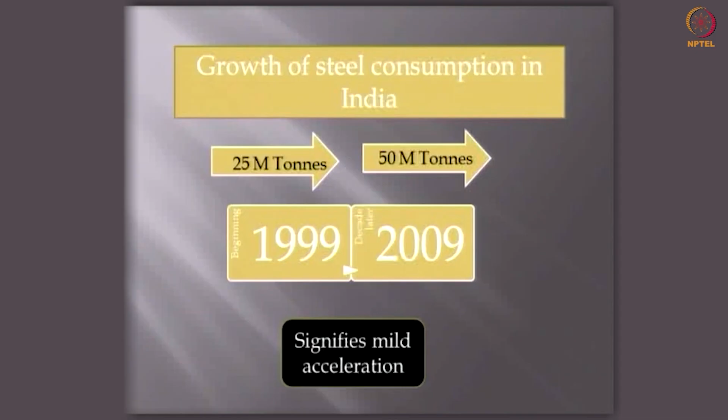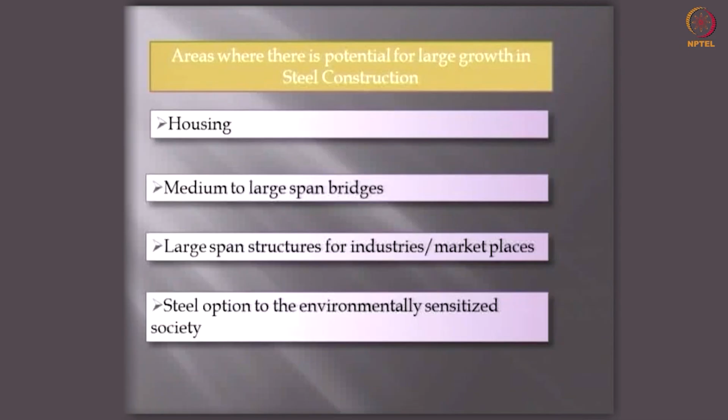So the government of India wants about another 20 million tons of steel to be used in the next few years. So the usage of steel in construction, not in the traditional avenues, definitely has a bearing on the Indian economy. Now these are the areas of potential large growth of steel construction in India particularly. I am not talking about the traditional avenues like industrial structures, trusses, very many small amounts of steel construction, but amazingly new types of structures.

The first is housing, the second is medium to large span bridges, because the requirement of these bridges is not dictated by the strength or the load, but entirely by community-dictated design parameters. I will tell you what they are as the lecture goes on. Secondly, we talk about FDI, the foreign direct investment in India, which is going to create quite a number of marketplaces for the short duration. So possibly steel is a very good option, and the number is going to increase quite amazingly.

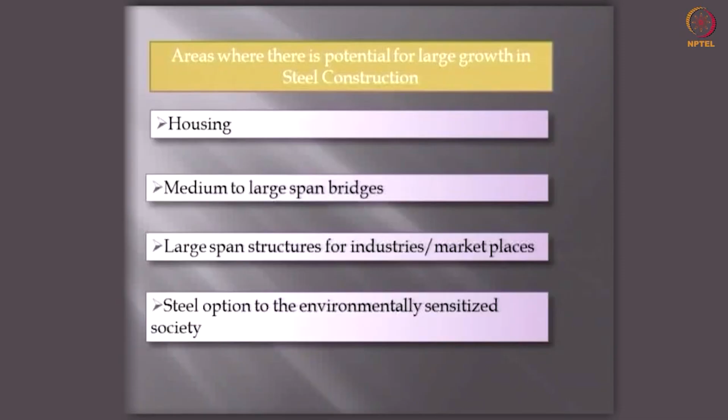And the last point is, today we are talking about sustainability, and every citizen is very sensitized about environmental awareness. So steel is good for a society which is environmentally sensitized. Right. Now I did not say impediments, but perceived impediments to the growth of steel construction in India. Possibly we can overcome them very easily.

The first one is that steel construction involves very many players. We call it the steel chain. We have a producer, a fabricator, a contractor, a designer. The chain is very long, and there has to be some institution which unites all these stakeholders in this business. We do have organizations set up by the Government of India. It is doing its best, but all the private players should come together to make it more meaningful. Today it is only piecemeal and fractured.

Now the culture of alliance: every company wants to make their product, but none of them come together to make an alliance so that steel can go into complementing areas of construction, which is unfortunately missing in the Indian context. This is not only for steel construction, but also for techno-legal issues. If the stakeholders come together, all these issues which are against steel construction can be dealt with in a much better way.

And finally, we have to admit that the weakest link for steel construction in India is in fabrication, because we do not have medium grade fabricators. Either we have top notch fabricators or we have roadside fabricators. Possibly this is one of the avenues where India has to grow.

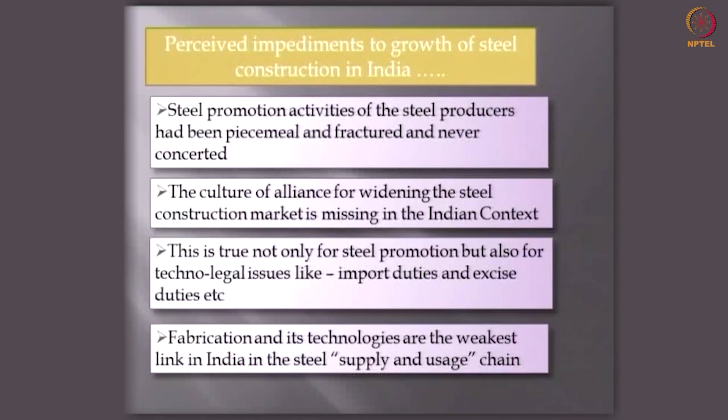Right. Now the impediments are not a problem for us, because we have success stories. We started constructing pre-engineered buildings, called PEBs, in the year 1999, and today it grows around 15 to 20%, and it has almost nudged out the traditional structural steel work. You find every industrial structure is going to be a pre-engineered building, but when the PEB was introduced, the market or the contractors were not very receptive. They had quite a lot of questions, and today PEB is unstoppable.

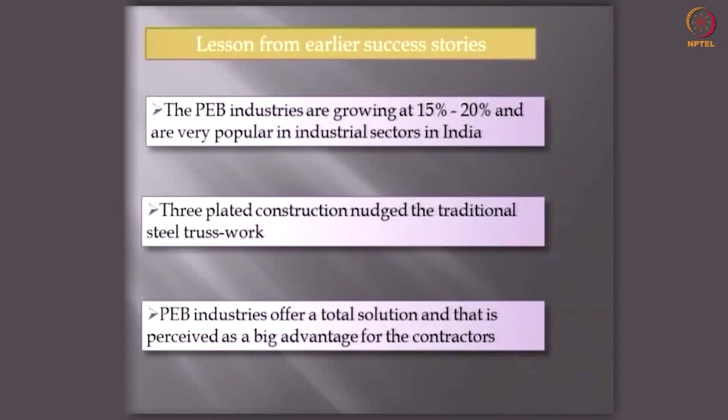Possibly because it offers a total solution, and this has been perceived as a big advantage by the contractors. So I am sure in future steel construction is going to grow in a big way in a country like India. Well, I will now give the avenues of large usage of steel construction.

This is precisely what I said earlier. This is not about the steel which is going to go into traditional avenues which have already been used. This is completely new avenues. The first one I talk about is residential construction. During the end of my lecture, I will show a live example of residential construction that is currently happening in Chhattisgarh, where I was fortunate to go and document a residential flat, about 180 flats.

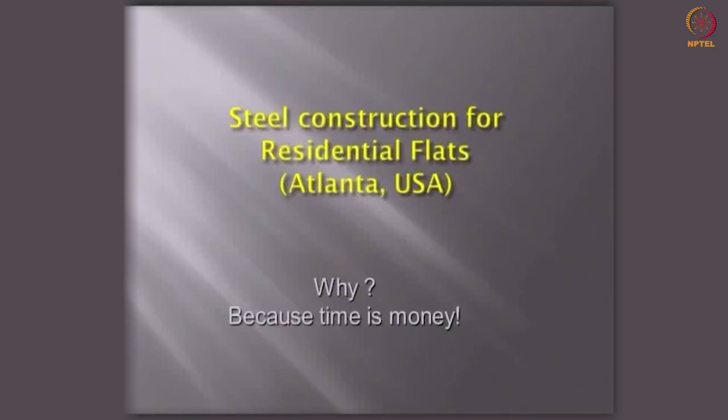Why are all these quick time constructions, or we say rapid constructions, coming up? Because in India also we have started feeling that time is money. We all know that the Western world runs on the principle that time and money are one and the same, right. I would like to give an example.

This is a 180 flat multi-story building that has come up on 10th Street of Atlanta, very near to Georgia Tech, and the specification for the construction is not the strength nor the material, but the time. They said within 9 months the entire construction is to be completed and has to house around 180 students. So the time was the major parameter for this, right.

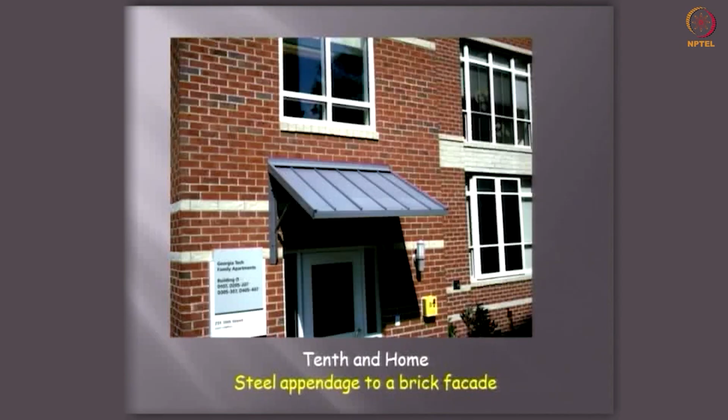Now all these flats are steel concrete composites. You can see this. Much of the steel is appended to the existing facade. You can see here we have a sunshade which is appended to the brick facade. All these sunshades or any other appendages can be fabricated outside and can be quickly fixed onto that. So you can see this is not a brick facade, but just a CP board, and then externally we have pasted a small amount of bricks, giving us a beautiful view of a traditional brick building.

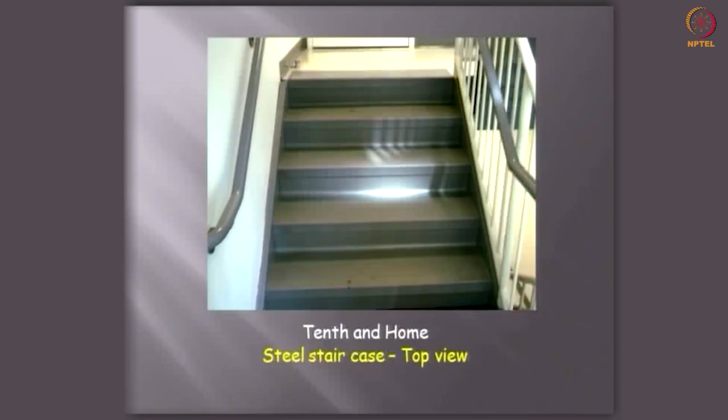Right. So this is the external view of the 10th and Home. As I told you, about 180 flats are there, but it does not look like a steel concrete composite building or even a cold form steel building. It presents a beautiful view which merges with the existing other structures. It is not like transplanting something else. So in residential construction steel can be used. This growth is going to be much higher in India in future, right.

Now this is not the residential sector alone. For commercial buildings, as we all know, time is the major criterion. So I was fortunate to document one of the commercial buildings, which is called Turner Broadcasting in Atlanta. Again the specification for this is 6 months, because this is purely a competition between two different players, and a particular company comes and tells the contractor, by this time I want my structure to be ready and operational so that I gain into the market.

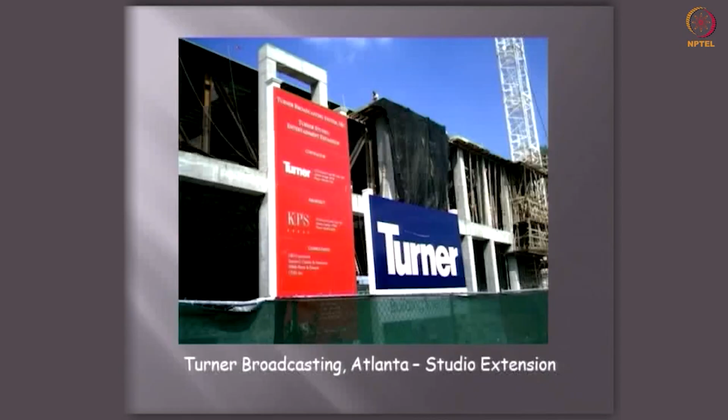So this was a very good case for me to present. You can see here, I have just taken the photograph on the 3rd floor. That means the next day was the concreting, right. So on the 3rd floor you can see the steel main beams. You've got the secondaries on which we are putting a steel deck sheet which has corrugations to give us the moment of inertia. So we will have to put a small amount of reinforcement and then concrete on the top.

Now that gives an advantage: you can see here the 2nd floor is ready for work. In fact, when I was there, the 2nd floor was occupied by the service crew. They start putting the pipes, they can start putting the vents. On the first floor, as you will see in the next slide, the services are nearly completed.

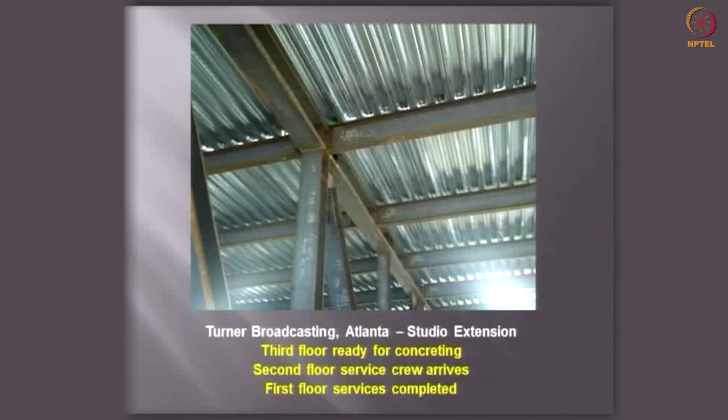So what we can see is the construction sequence does not necessarily wait for the entire frames to be ready or the walls to be ready. In fact, floor by floor, when the last floor is finished, I think the ground floor can be made ready for occupancy, right. You can see here one of the advantages, I said, the fabrication.

The great advantage of the steel construction is that the components are fabricated elsewhere, so it does not block the site. They are brought and then bolted at site very quickly by using pneumatic tools. But probably India has to grow in this particular area.

You can see here the man is working, he is a service crew member. That means while the concrete is going on, the civil crew is there at the third floor and the second floor is occupied by the service crew. Right. Now, this is the photo of the ground floor.

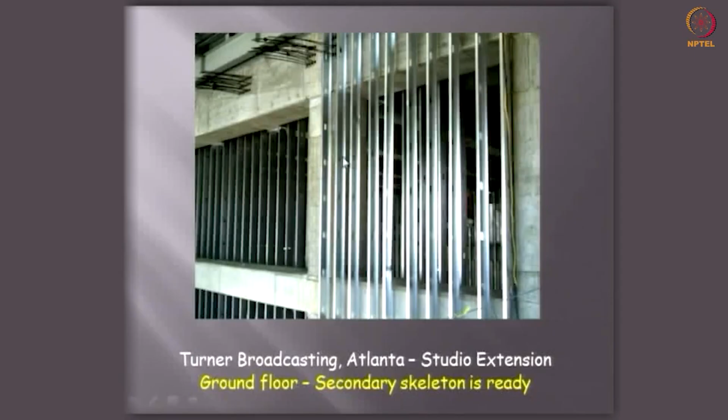You can see here these are all called wall studs. These wall studs are going to receive your cement particle boards or gypsum boards. So, they are almost ready. You can see here the inside of all the wall studs are ready, and then the occupancy, all the services can be started.

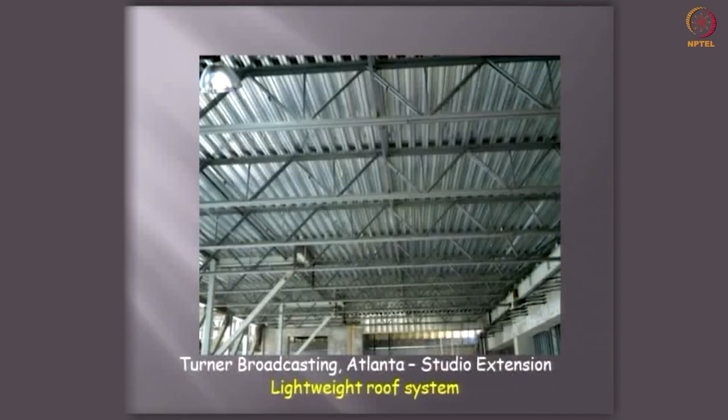Now, this is also a lightweight roof, in the same building, which was built in about 2.5 days. Once the spans are ready, all the components are fabricated, then fitted and bolted at the site. So, the entire construction was finished in about 5.5 months.

Good. So, I would like to go to another avenue for steel called public structures. Many of us think that public structures are not just used, but abused. So, steel is not a preferred material for public structures. But I found many of the public structures in the western world, or even some parts of Delhi, amazingly performing. So, I will just give you a few examples of how steel has been used in public structures.

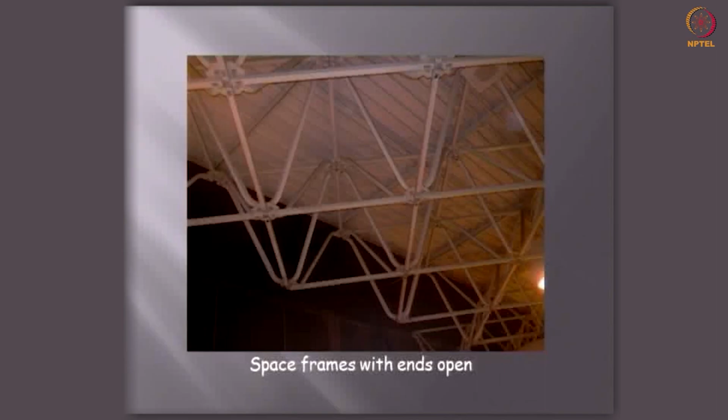This is the Hartsfield airport. You can see here all these RC beams, and on top of the RC beams they have synthesized a steel space roof. This is the steel space frame or space roof, which is architecturally synthesized. You can see on top of it a steel sheeting, and amazingly it has been integrated with the existing concrete structure.

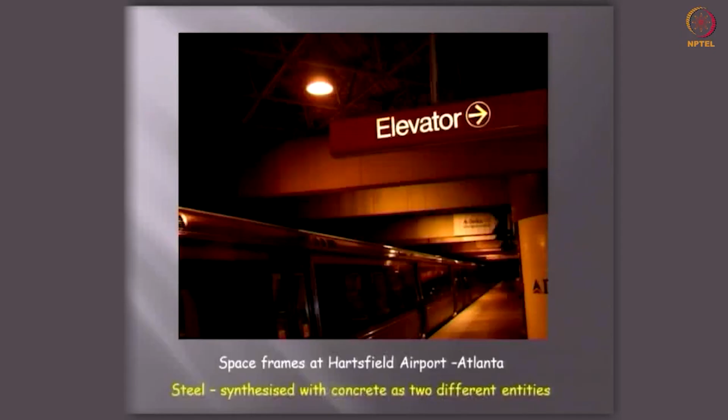So, we can see steel can be a complementary material in very many situations, especially for beauty, for aesthetics, and also the time of construction. These are space structures, which I will cover a little later, and today we talk about sustainability.

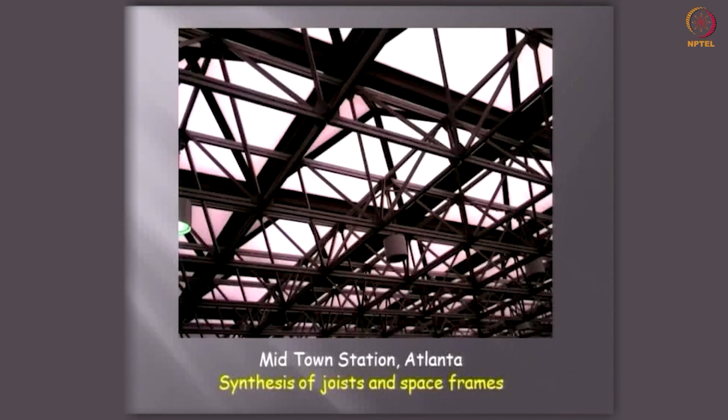This was actually an underground station, Midtown Atlanta. Simple truss structures have been put so that natural light comes in almost the entire daytime. You do not need any light. You can see here the lights have been switched off, and you are getting an ample amount of light inside the station. So, what I am saying is, steel can merge with materials like glass or any other material, which is going to give you an advantage in service also.

So, this is one of the public structures in which glass and an orthogonal truss system is used in a public place. Oh, this is beauty. Actually, you can see here all the columns used here are steel concrete infilled columns. You can see here the services, the water drain has been taken into the pipe. This is a public structure, very nicely integrated with the lighting.

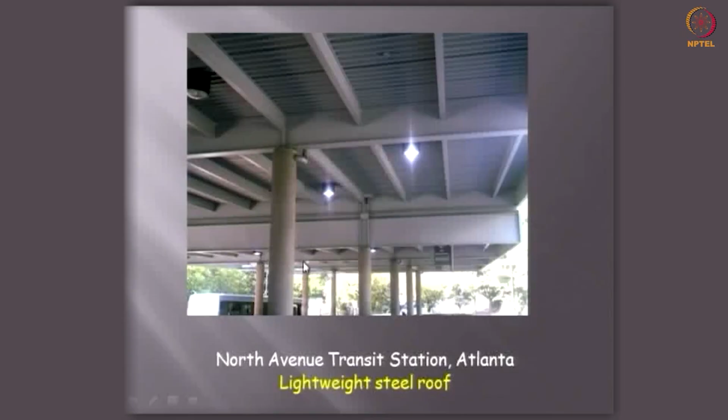You can see the buses, and this is another view of the public station. You can see a lot of floor space is available, because the intercolumn space is quite large, and since we are putting a steel outer shell and infilling with high-strength concrete, the column can be quite slender, so for the same area we get more usable floor area. The circular columns are not only for visual appeal, but also give a good sense of beauty. So, it is not a real concern that steel can't be used in public structures.

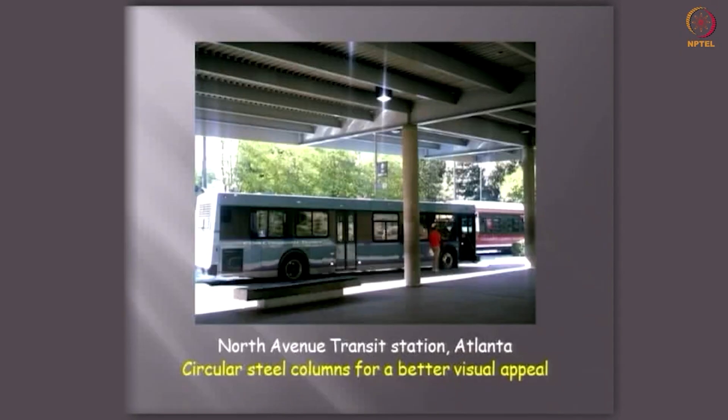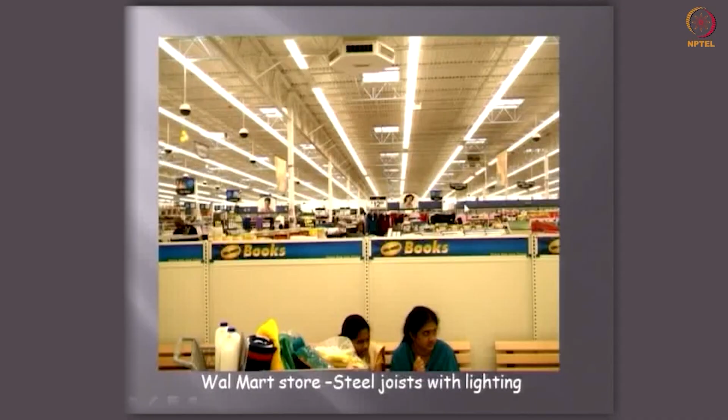Now, the next is architectural splendor. This is the Walmart Lithonia. You can see here there is a large column-free space. In fact, if you see the next slide, it is almost like an unsupported free space, because these columns are very slender. They do not even come into your eye line at all. So, you can see here the marketplace space is going to increase. That is the point I was making.

Today in India, we are moving towards merging, and globalization is taking place in a big way. Quite a number of marketplaces are coming up, not only for consumer goods, but even for storage of production materials. So, in those avenues, steel can give you a very good advantage.

So, this is also a beautiful architecture. You can see here light and trusses have been merged. It gives a fantastic view. You get a very large space in which you never knew such a steel structure has been put in. You can see the sheeting on the top, it is steel, and all these simple trusses, you can see the fly braces.

So, very small elements are put together into a quite rigid system, which offers us a very good advantage for steel for architectural beauty. So, this is a Walmart Lithonia store.

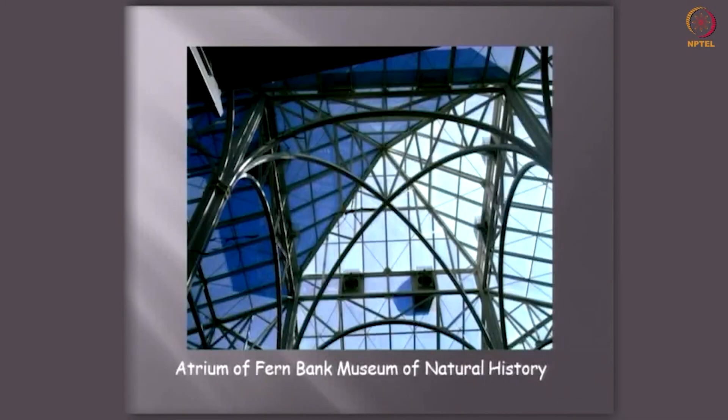Also, in the case of the Fernbank Museum, we are going to have some very monumental structures maybe in the future. Now, we see monuments are being built for very popular political leaders, or for remembering a particular event. So, in all of them steel provides a very good option.

This is the atrium of the Fernbank Museum of Natural History, again in Georgia. So, you can see here glass and the traditional steel truss work have been combined to give a beautiful view. Not only that, you can see here steel has been appended to the existing masonry structure as well. So, this particular material is not standalone in use, but it is going to merge with masonry and quite nicely with concrete.

And the usage of the steel, say for example, there is a large party hall. So, you have a column-free space taken only by one particular central octagonal column. This column supports a big truss work, and on top of the truss work we put glass. So, even in the evening, sometimes they have a moonlight dinner here, no lighting at all, the dinner is conducted purely by the moonlight.

So, the point which I am making is steel can be appended to or complement any architectural space that you are doing. You can merge with the masonry, you can merge with concrete. At the same time, this can also be used to take care of load. You can see here the truss reaction is transferred to the masonry wall by an appendage. So, this kind of integration makes steel very good for an architectural purpose.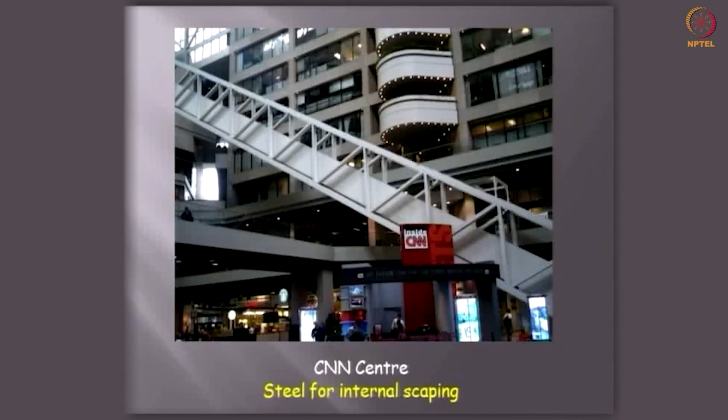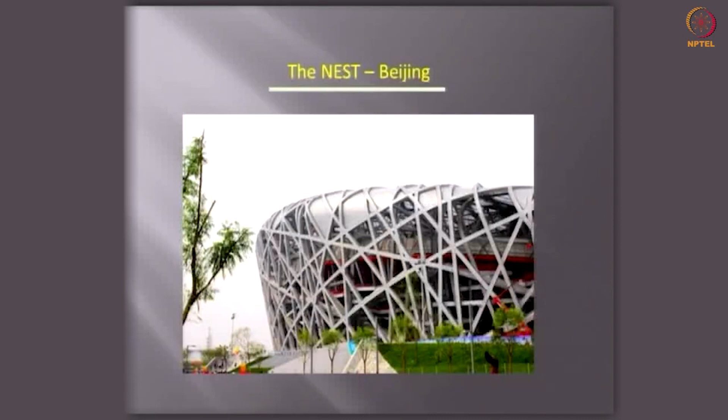Now, I move on to some of the real world space structures, because as I told you, the marketplaces are going to come up in a big way. So, we are going to have quite a lot of space structures, and of course, everybody knows the most popular nest, the Beijing Olympics, which showed many things can be done with steel, not necessarily in a very prismatic way, but we can do shapes which can represent nature also, like the nest.

The next one is this double layered space construction, which is quite popular. You might have seen this at many petroleum outlets, but in the Hyderabad area, you can see a large number of these space structures. What is the advantage? All these components are very slender, and you can cover a large unsupported space.

You can see here the column. The column is a very slender column with a tripod, over which you have got an arched two layer truss. So, these can actually be dismantled and you can use them elsewhere.

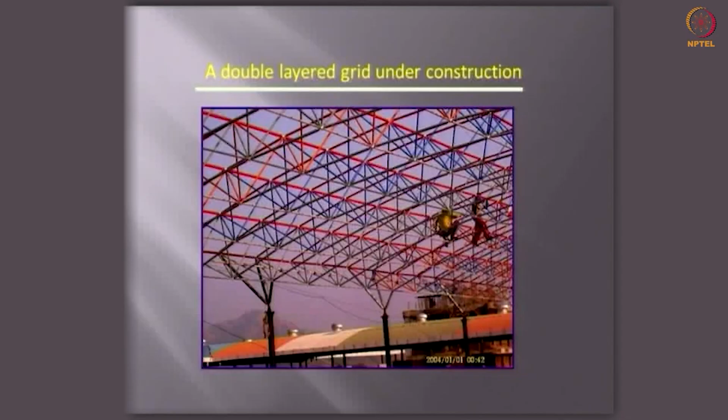So, one of the major advantages for this is in the future there is going to be lots of marketing space. Steel can be an ideal material for quick erection, and if it has to be shifted somewhere, it can be very easily shifted. So, the double layered grid is a very good system to span temporary, but of course large, spaces. Now, this is one of the pyramid structures.

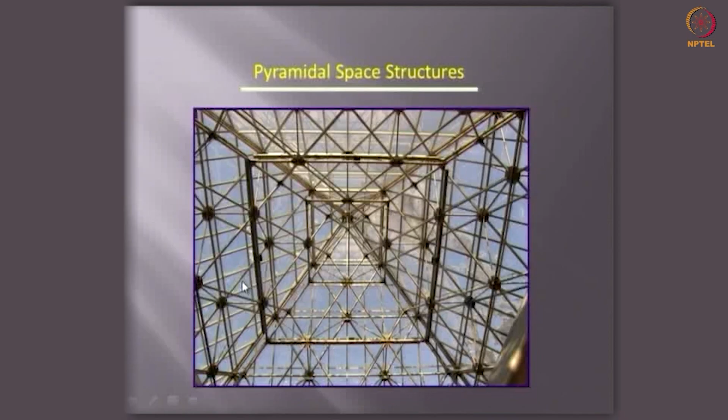You can see here the space structures have been used for architectural beauty also. One particular reason for all these space structures is you do not need big skilled labor to construct it. Once you have got the marking of all these space structures, which will tell you the member is going to the north or the south or the east, every member is numbered and every node will be numbered. So the connection between numbers is just by simple people. So we can get untrained labor also to construct all these space frame structures.

So, the next part is bridges. Quite unfortunately, steel was the primary construction material for the bridge structures in the British times and even during our independent periods also. But unfortunately, the deep sections were not available and the fabrication was not supporting the growth of the steel bridges. So possibly there was a drift from steel to pre-stressed concrete and other structures. This is the point which I made.

Now, the bridge structures, let us say in metropolitan cities or tier 2 cities, are going to come not by the strength and the traffic, but by the constraints the space is going to offer. So this is one of the curved box bridges. Imagine in Chennai or in Mumbai we are going to have a bridge. You can't locate the bridge piers as freely as we think; it's going to be determined by the space available or the kind of structures available. So very many constraints are going to come.

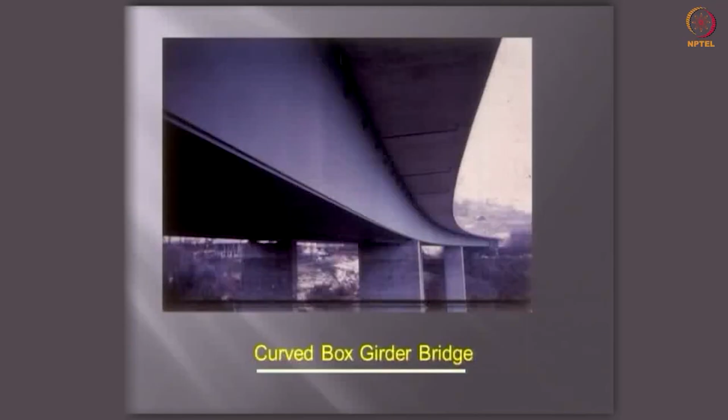So if you want to quickly build a curved bridge or a box girder bridge, steel is a wonderful option for that. I can show you these are the composite decks. You might have seen this today. The NHAI proposes many of these steel concrete composite bridges to span over the railways. What is the reason? Because I can easily launch; there is no blockage of traffic, either train or road. So the columns are erected, over the columns we insert our beams, and you can see here these beams will have what are called shear connectors, and these are all braces.

As you know, as traffic goes, there is a lateral movement. So we would like to introduce these braces for the best performance of these bridges. This is quite popular now in India. Most of the bridges which span between roads or railway tracks are coming by this composite technology. That is a big advantage for us because we can just put on the concrete deck very easily. We put reinforcements and it can be cast without blocking anything at the bottom. So these kinds of space constrained bridges are becoming quite popular in India as well.

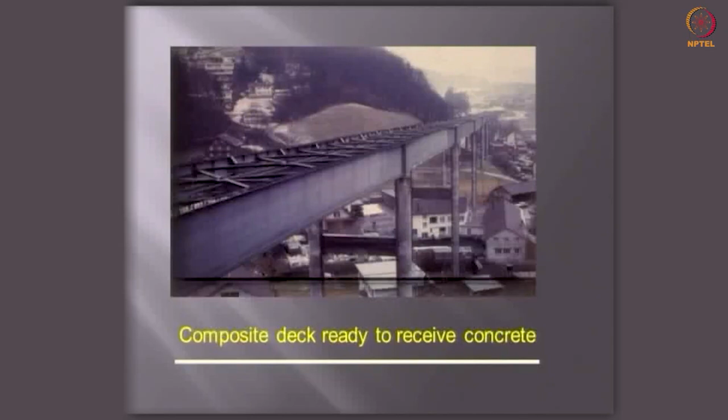Of course, the suspension bridge with the cables: you can see here you have the cables, you have the suspenders and deck. This is a classic example. We have a couple of bridges in Goa which are cable suspended bridges, but as the technology and the competence of the engineers or the contractors start increasing by doing a couple of bridges, I think more bridges will be there. This is especially for crossing the waterways. We have a problem of space, we have a navigational space. So all this can be covered.

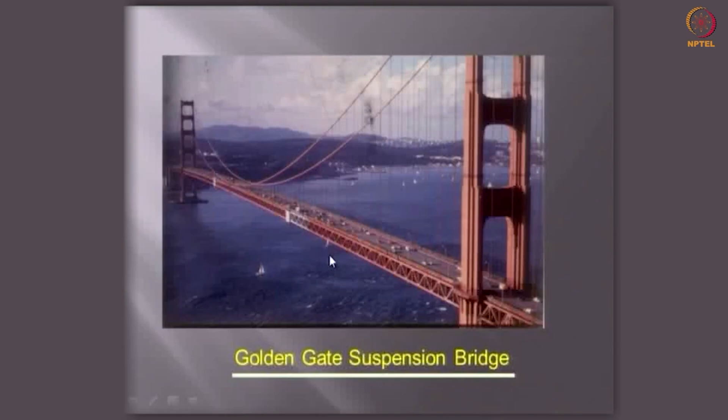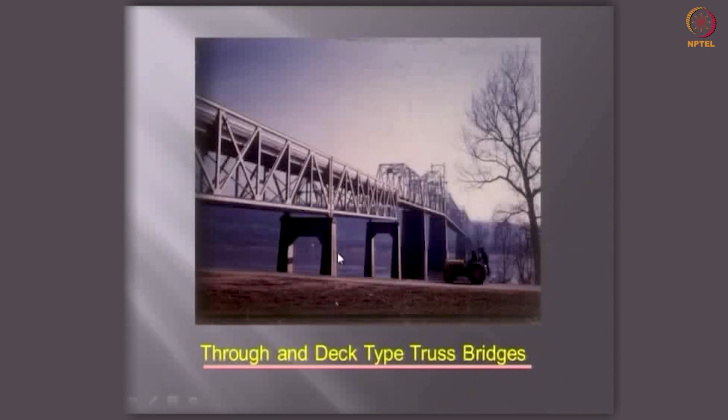So this is a good example of where steel can be used, and again this is an example. You can see here we have a deck bridge which is converted into a through bridge. This is because of the navigational height which is required. So many times the structures are built not for the strength or the amount of load that comes. It is not about how many broad gauge trains are going to come, but the navigation, because they obstruct the navigational way, possibly for the fishermen or the fish species to migrate.

So all the structures are going to be located in a very serene environment. So most of the time the structural systems are determined mostly by the environmental conditions. So you can see here a clear example where a large navigational height is required. So a bridge has been converted from a deck to a through bridge.

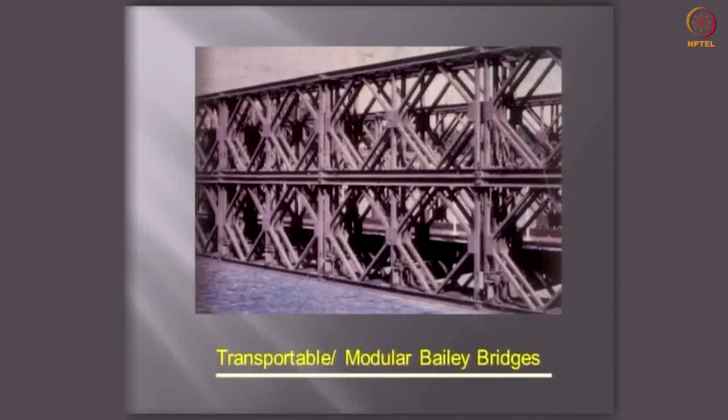So such kind of special usage can be there, and this is called a transportable Bailey bridge, right. Many times we use this; the army used it in their operations. This kind of Bailey bridges are quite popularly used in the northeast of our country, where there are deep ravines and small spaces to be crossed; you can use these modular bridges. These bridges are transported, they are fitted inside, and the deck is paved and you can cross with that.

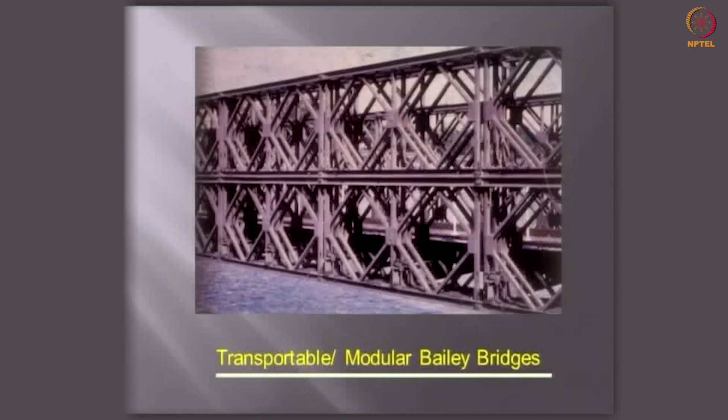Some of you may remember that when the arch bridge in the Jawaharlal Nehru Stadium failed before the Commonwealth Games, within about a week the army people came and put up the Bailey bridge for the pedestrians to go.

Another one is the point which I say, this is a really amazing bridge that I have read about. This is in 2012. This bridge was built in Japan, and the reason is beauty. You can see here, this is backwater, and you can see an estuary over here. This is the land for lots of birds and fish species also, and the egret is one of them. It's just like a crane.

Now the construction constraint came because the vertical pylons were obstructing the navigational way of these birds, the egret birds. So what they did was, from the traditional bridge they just lowered the supports. You can see here, this was the normal cable-stayed bridge that we use. So the support for this span alone was taken down.

You can see here, this is the space in which the egrets fly. So in this area the system was lowered so that the pylons do not obstruct the space of the egrets, and this is the real bridge. You can see the support at the bottom, and it is not for the entire stretch but only in the stretch for the estuary. So when these kinds of environmental constraints come quite often, naturally in India also they are going to come, I think steel is an amazing material where you can really customize the use.

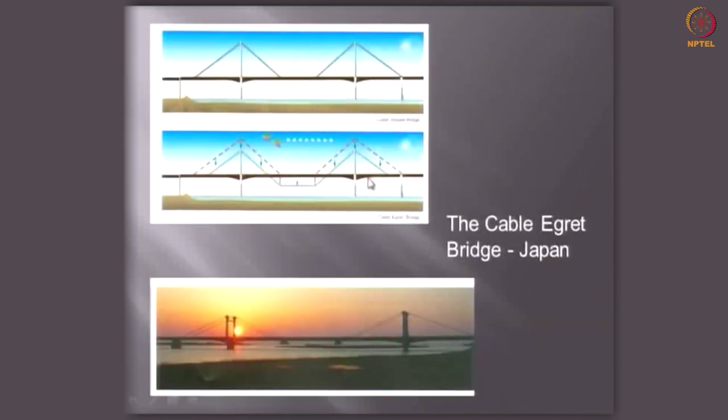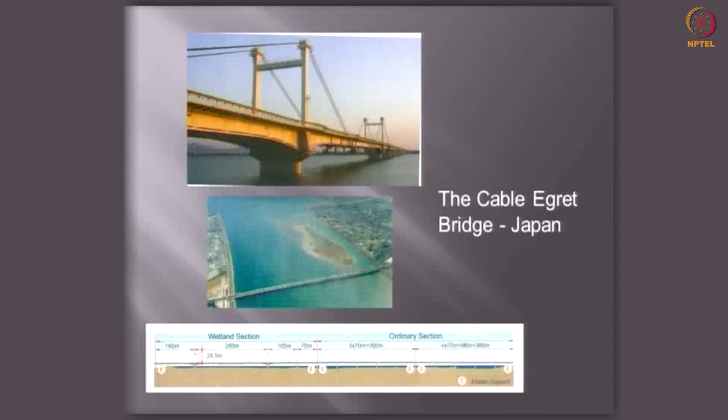This was a bridge you can read about on the website of the Japanese Institute of Steel Construction. It is a fabulous structure, how the entire mechanics team, the environmentalists, all of them sat together to provide an unobstructed space in the estuary. So this is what they call the cable egret bridge in Japan. So my point is that the requirements of the structures are not necessarily going to be with respect to the structural parameters, but sometimes mostly the social parameters, the environmental parameters, in which steel can play a big role.

Okay. Now the next part which I want to talk about is steel concrete composite structures, in which we are getting the best of steel and concrete. I was amazed when I was moving in Chennai towards the East Coast Road. I found a couple of steel concrete composite buildings that had been completed not by engineers but by non-engineers. It was a non-engineered construction. When I approached them, it was done by a contractor who had just gone abroad, saw a building and came back. So he said this option is going to work.

So this is a steel concrete composite system. You can see here, this is the steel beam over which we put the deck sheets. This is also a steel sheet, possibly of 1 mm thickness, 0.8 or 1.6, depending upon the span I want to cover. Then over the top of it I put a very nominal reinforcement just for shrinkage and temperature, and we put what are called shear studs. These shear studs are the elements which integrate the concrete deck and the steel part.

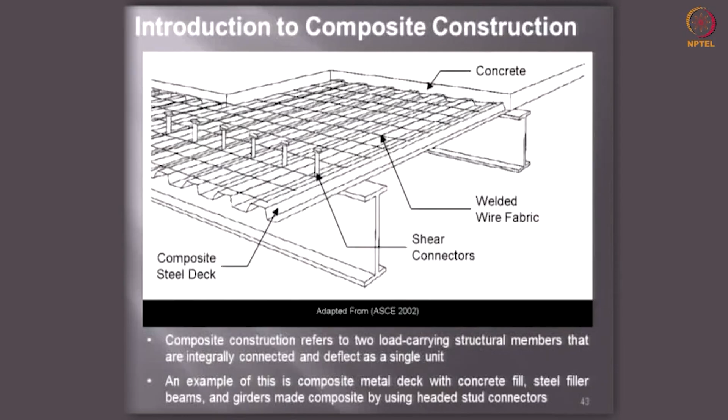What is the advantage? Once I have the steel beams ready, I can just put the sheets on top of it. On top of it we can drive the shear connectors and we can just concrete it. No support, no propping is needed and no formwork is needed. So this was the one I was talking about, what happened in the East Coast Road commercial building. Right. Now this is the actual composite, how it looked.

You can see here the Young's modulus of the steel and concrete is different. So at the interface they will try to slide across, and also they would like to come apart. So we have provided the deck in such a way that the uplift or separation between the steel and the concrete is prevented.

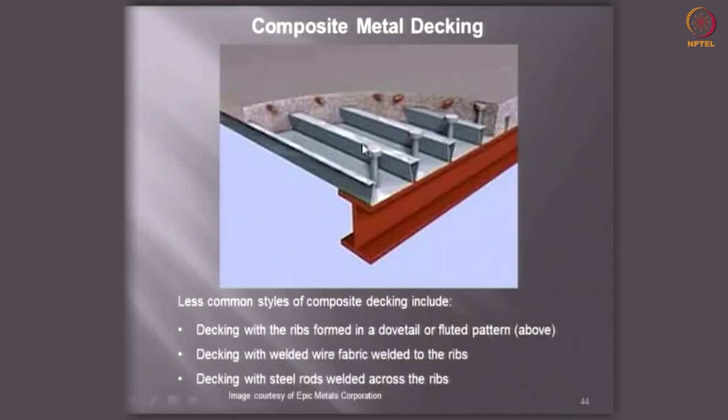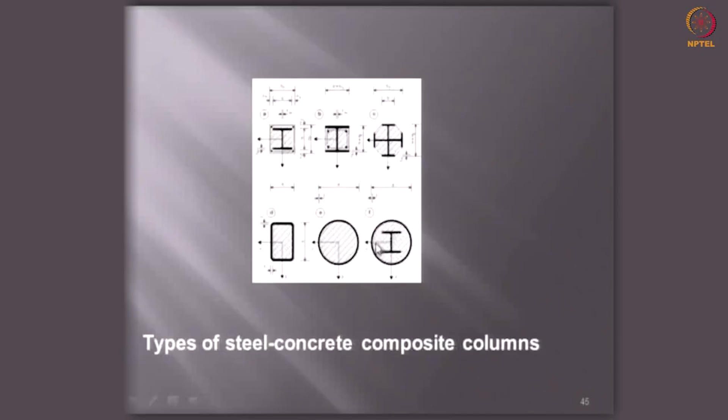So this is exactly how the system would look like, right. We also have composite columns, in which we can have a steel column and we put concrete around it for, say, fire protection, or we can have a steel shell or tubular section, an RHS or SHS, and then we can infill concrete into it, or both. This is the best system; we have said that if you can use either of these two, we get quite a good advantage in terms of strength, right.

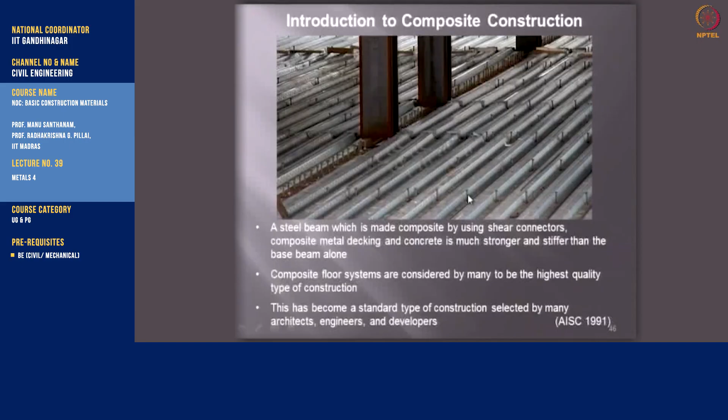Now this is what the actual system looks like. You can see here, these are columns, these are the primary beams, these are the secondary beam directions. We have just put the sheeting and then we have put the studs. You can see here, this is the nominal reinforcement that we are going to use. We can come and see here how the decks are placed, right.

See, this is the primary beam between the columns, we have the secondaries, and just over the secondary beams we can put the sheeting. This sheeting can be made to any length, because the rolling is done on the site. We get a coil of large length, so we can load it quite nicely onto the secondary beams, and after this the studs are driven on the secondary beam. After that it is ready for concreting.

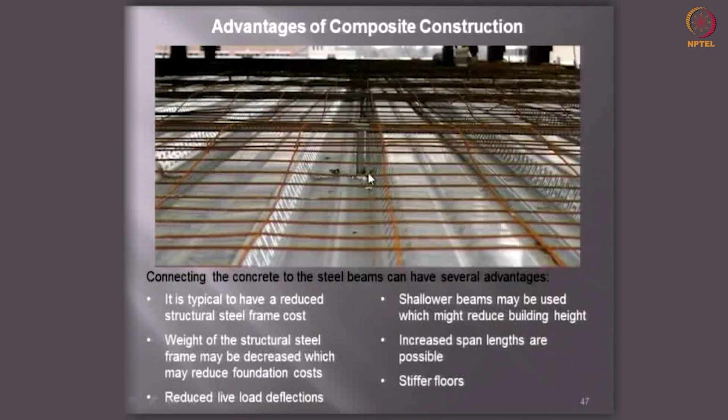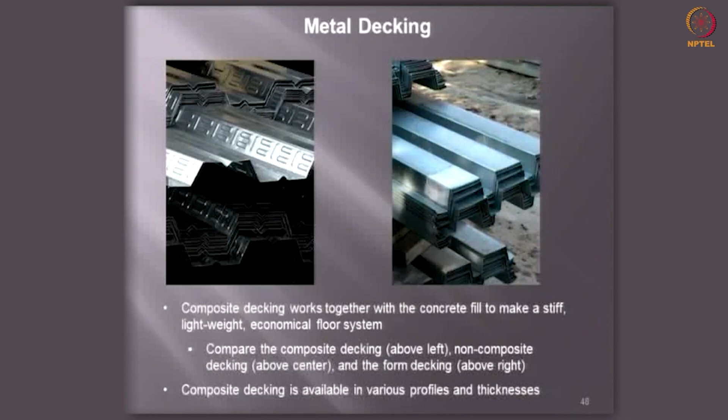One of the advantages of this is the nesting, right. All the deck sheeting material can be easily nested. So it provides lesser transportation cost, and the storing space needed is also very less. So it is not only in strength alone, but also in construction practices that these steel concrete composite structures are going to give us a good advantage.

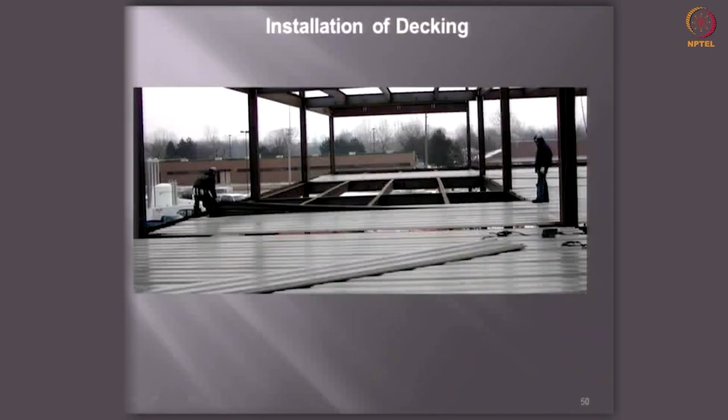We have already seen how the deck sheet is placed. You can see a very long deck sheet as a single piece, right. You have the primaries between the columns, you have the secondaries between two primary beams, on which you have put the deck sheeting. How are these long sheets transported? You do not need to transport them; you can have a rolling mill at the site and it will roll it for any length you want. So that is the advantage of these deck sheets. No need to make the sheets and have them transported.

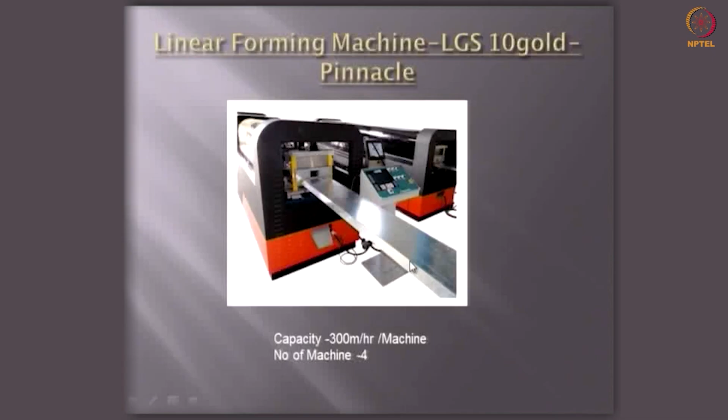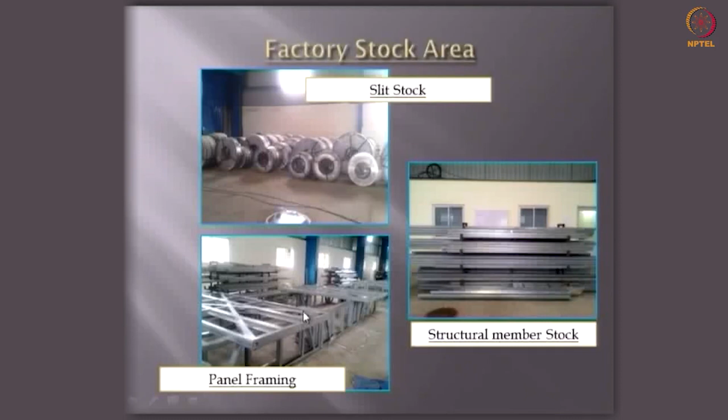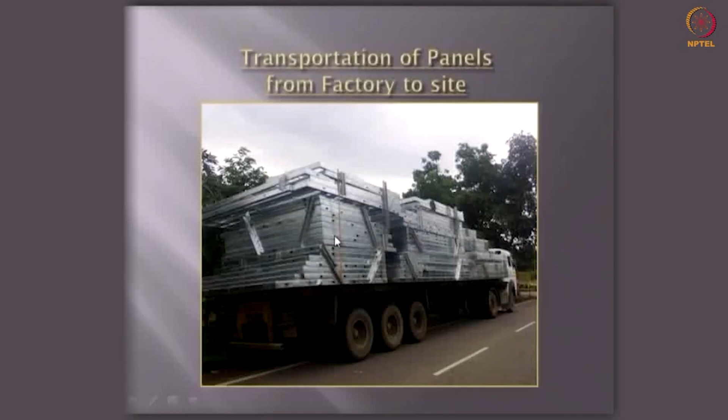So structural sections come out. You can see here a section, a channel, is produced from this. The length of these sections depends on the length of the coil or the roll. This can be made into structural members and also the structural framing. Once they are made in the shop, they are transported like this. From factory to site, we have got 12-meter long trucks, and we can load all these materials onto the truck to the site, and there we have a very light foundation.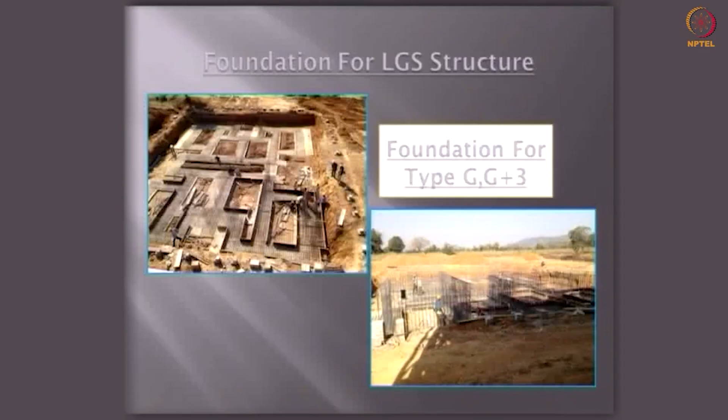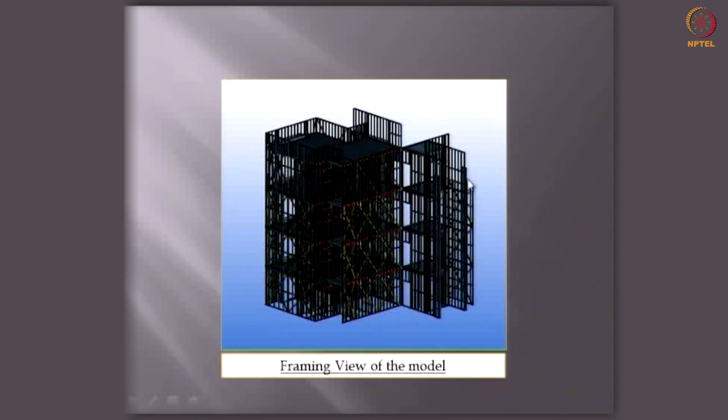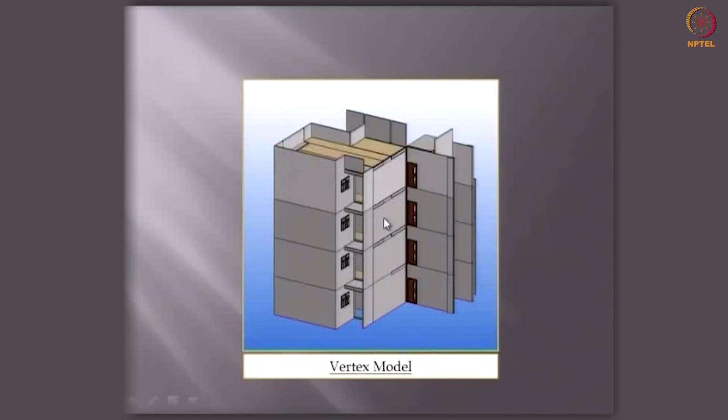You can see here the foundation is just a simple spread, it is not very deep, no piling. This foundation was for a G+3, right. So it was a very simple foundation on which we are going to erect. This is the computer design model of a G+3 system, fully cold formed. All these members, the channels, are made out of the rolling mill. Now this is the final rendered model of the house. This is the house that we are going to build, a G+3 system, right.

Now this is how the residential G+3 was built in Parsada and Raigad in the state of Chhattisgarh. This is the stage in which it is being constructed. You can see here the stages of construction.

You have G, 1, 2, third floor is being constructed. The total time taken for the G+3 was less than a month, because all these skeletal members are manufactured. These are called cassettes. You can see the side wall, the panel units, these are called wall cassettes, and what is put on the top is called the roof cassettes.

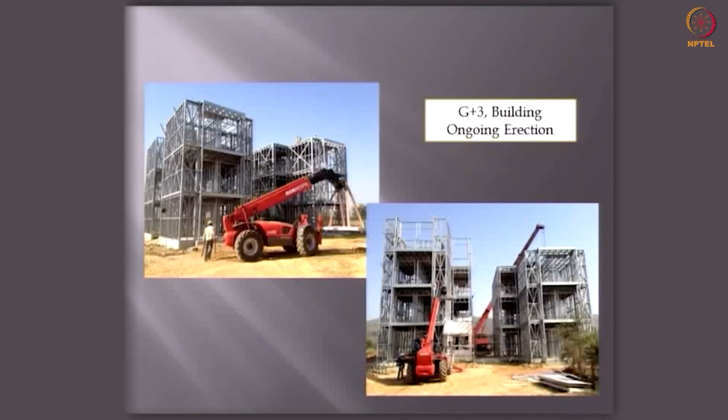So, the wall cassettes and the roof cassettes are transported, and you can see here the flooring is by CP boards. In fact, in this project what we did was a 20 mm at the bottom and 18 mm at the top, and in between we had a steel roof cassette, and on top of it we put normal ordinary tiles, what we see in our buildings.

Now, this is the finished work. You can see here this is the work that is completed, and this is just going to be complete. You can see here the vertical staircase is of hot rolled steel. So, you can see the hybrid structure, all these ones which are galvanized cold formed steel G+3, and this is a hot rolled steel staircase.

Now, this is almost completely over. You can see all the side walls are by CP boards, like cement particle board, which have been painted to look like the same color. Even the floor also, it was not a concrete deck floor as I explained earlier. The floor is 20 mm at the bottom, and then 18 mm at the top, a sandwich with a roof cassette. So, we tested it and we found it is quite adequate.

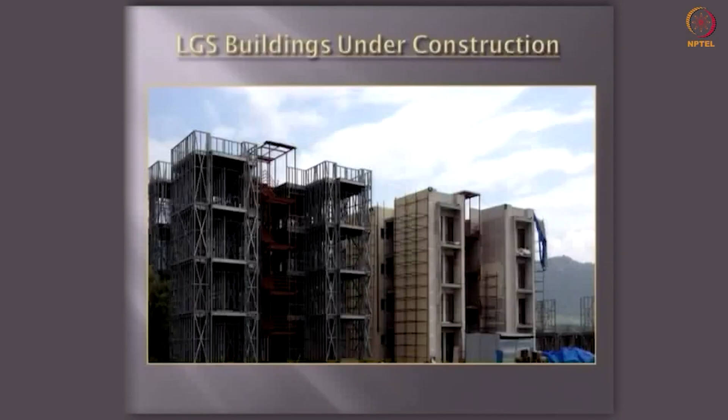You can see here another construction is going to start side by side, and this is how the construction sequence is happening in this, right. So, you can see here we are going to extend one floor. Again on the circumferential wall, this panel, the wall cassette is fixed, and you can see these are all temporary props till the top construction.

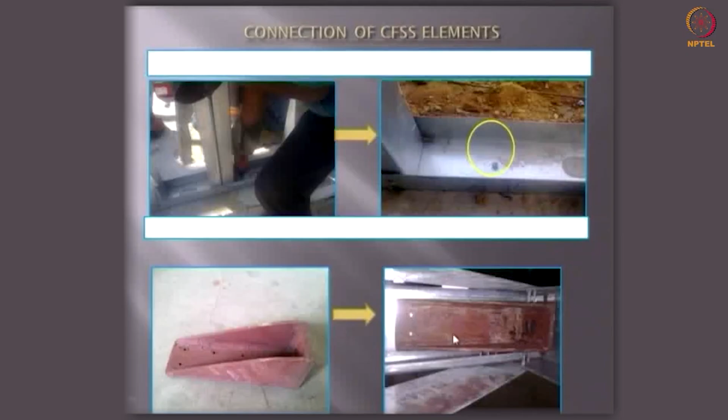You can see here all the walls are ready in about a day or two, then we put the roof cassettes, and since the connections are very simple, you can see here the connection between what we call the track, with the bottom track to the vertical column we put a small shoe, this is called the iron shoe. We can just pin this up into it. So, this iron shoe will give you the moment rigidity at the joint.

And how do you fix these tracks onto that? Straight away drive a pin, so this is called self drilling, self tapping screws. So, what happens, they have a thread, and if you just drive it from one side, there is no need for any nut on the other side. So, the connections are quite faster, and when I experienced this, a room wall was constructed in about 10 minutes time.

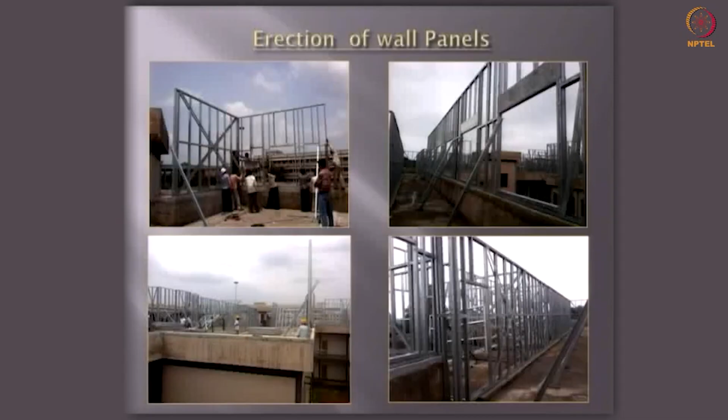So, it is quick and easy, because the amount of weight on this system is going to be very less. Probably in future lots of spaces can be acquired, not necessarily we should have the space. Any existing building, if it can take a light load of about 2 kilopascal, these cold formed steel systems can be easily appended. This is the connection I said.

So, finally I would like to summarize my lecture. Although this is a dream, what I tried to give an idea of was what the future of our skyline is going to be in terms of steel construction. Now, the future era is going to be an era of time compression, because every project is set against a particular time within which people have to complete, and within the time the business grows. So, in the time of time compression, time is a big investment along with money.

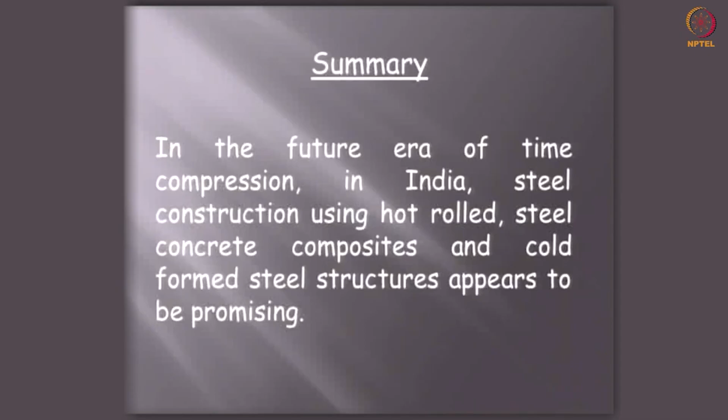So, in such a scenario I find steel construction using hot rolled, which I told earlier, and steel concrete composites, which always get you the best of steel and the best of concrete, and cold formed steel structures appear to be very promising. Of course, this is not my dream, but it is happening in India. Only thing, we are in a starting phase. When more students start learning this, and more institutions start doing research, you will find steel construction in India is to grow in a big way.